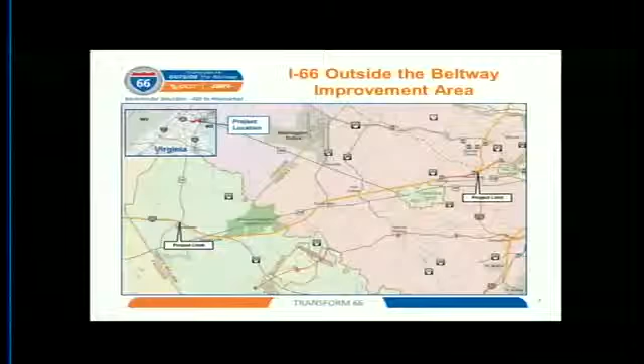Many of you have seen this map many times. We're looking at the corridor of I-66 from Route 15 in Haymarket to the Beltway, basically going through both Prince William and Fairfax counties and the associated cities and towns.

We've been very consistent in our message as we've rolled out this project. We started with a purpose and needs statement that looked at addressing the existing and future transportation concerns along the corridor, improving the multimodal mobility along I-66 by providing diverse travel choices in a cost-effective manner. We also looked at enhancing the safety and travel reliability along the corridor. One of the things I do want to say is that our focus has truly been on moving more people, not just moving more cars.

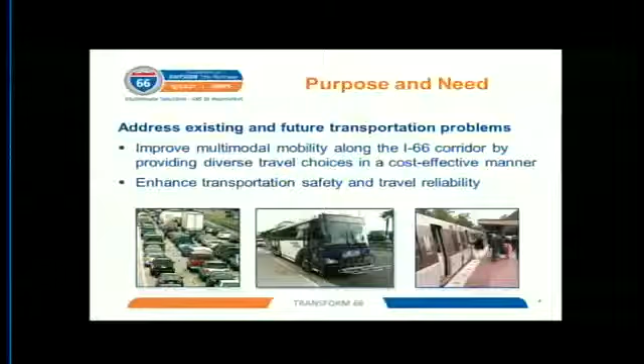Let me give you some background on the project, a recap of where we've been. In November of 2013, our federal partners, FHWA, approved a Tier 1 environmental impact statement with a record of decision. What that package entailed was 10 concepts that they advanced, and this project that you will see through this presentation is one of those.

Also, in July of 2014, we launched the Tier 2 environmental assessment for Transform 66 Outside the Beltway. In January and February of 2015, we held similar meetings in various locations to roll out the project and where we were at that time in the status of the project.

Our official public hearing, as I said before, was in May and June of this year, an opportunity to really record your comments as part of the official record. Also in August, our commissioner issued a finding of public interest, meaning this project is being considered under our PPTA public-private partnership. In order to advance a project under that concept, the commissioner has to issue this to make sure that it's in the best interest of the Commonwealth.

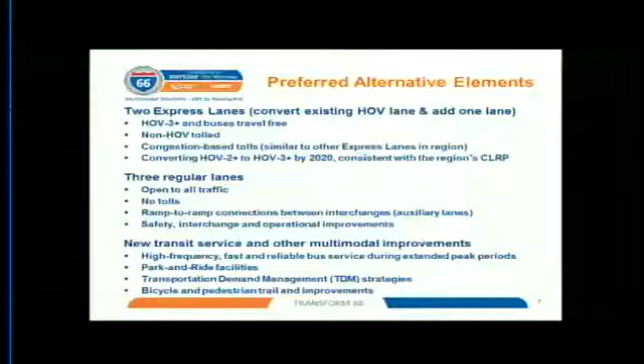So here what you have is a mainline cross-section. One of the key things that came out very early on from the public and from our partners around the region is the preservation of the median for future center-run transit. So you see that the preferred alternative does preserve that median. Many of the things you see, the 12-foot shoulders, the two express lanes, and then the three general purpose lanes, and then a 14-foot shoulder, being our typical section.

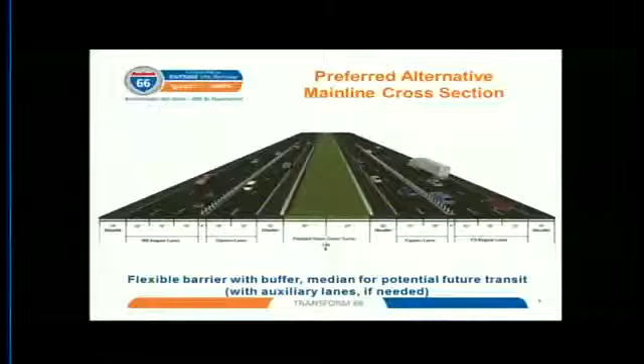So the phased approach, why did we decide to phase? One, we wanted to develop a project that could actually be implemented by 2021 and to invest wisely in I-66.

We realize that Metro is in the future, but we don't know when that's going to happen. So part of this project does not preserve the right-of-way all the way out through the corridor.

That will be handled in a phased approach as Metro comes online. Also, there is existing infrastructure that we can use instead of trying to tear down and rebuild, especially at Monument and Stringfellow, one of those areas where we're using much of the existing infrastructure.

So the elements of phase one basically include terminating the project at University Boulevard in Gainesville, which is approximately 4 miles shorter than going all the way to Haymarket. Also looking at phasing in the park and ride and the transit service as demand requires, and some of the safety and operational improvements.

Now, all of the improvements as far as the preferred alternative will be advanced in the environmental assessment, and basically the oncoming phases have not been worked out yet. However, our environmental document will cover the entire project.

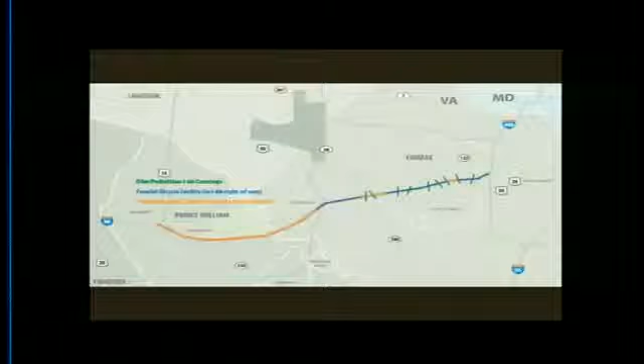In coordination with local partners and consistent with previous planning efforts, a trail concept parallel to the I-66 corridor has been developed. The project will provide more than 5,500 parking spaces through the expansion of 1 existing and construction of 4 new park and rides.

The project will offer new or increased bus service to regional destinations. Transportation demand management strategies may include increased marketing, education, and outreach, ride-sharing incentives, support for bicycling and walking, expanded employer outreach, and other incentives. In the next few minutes, this video will provide a brief overview of key features of the preferred alternative for Transform 66, as well as an initial near-term phase of the project, Phase 1.

The overview begins at the east end of the project, at the Capital Beltway, or I-495, and continues westward to the project's endpoint at Route 15 in Haymarket, Virginia. The preferred alternative is described throughout the overview, unless otherwise noted.

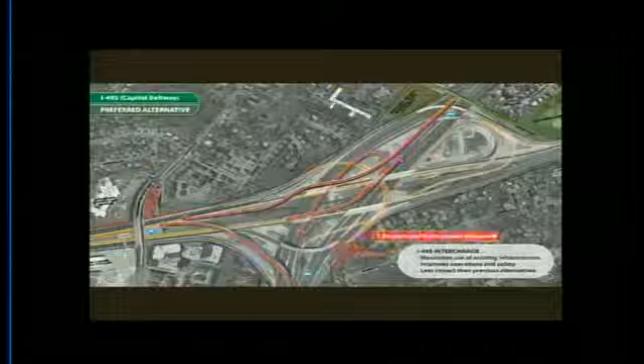Now let's get started. The I-495 I-66 interchange is one of the most complicated and important locations in the corridor. It connects the general purpose lanes on I-66 and I-495 and the future I-66 express lanes with the existing I-495 express lanes. The interchange layout shown here was purposefully designed to maximize the use of existing infrastructure, provide safe and efficient operations, and minimize impacts to surrounding neighborhoods and the environment.

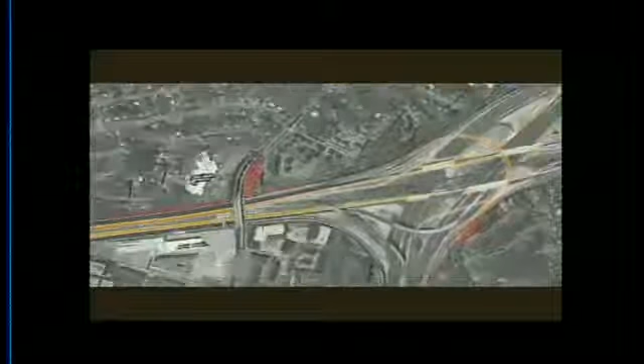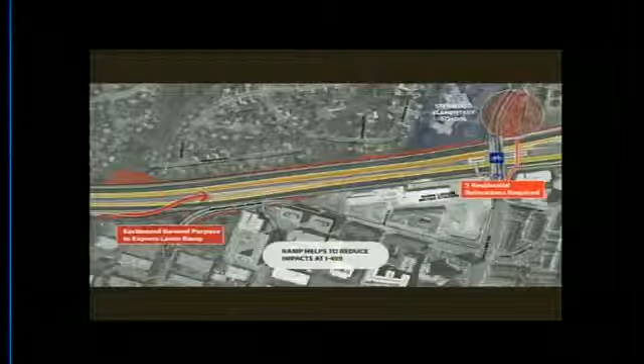Just west of I-495, the preferred alternative includes a direct access ramp connecting the general purpose lanes to the express lanes on I-66 eastbound. This ramp helps reduce the project's impact at I-495 at locations such as Stenwood Elementary School. In general, the project will provide 2 express lanes and 3 general purpose travel lanes in each direction of I-66, as well as bicycle and pedestrian trails and sidewalks, with local and regional connections.

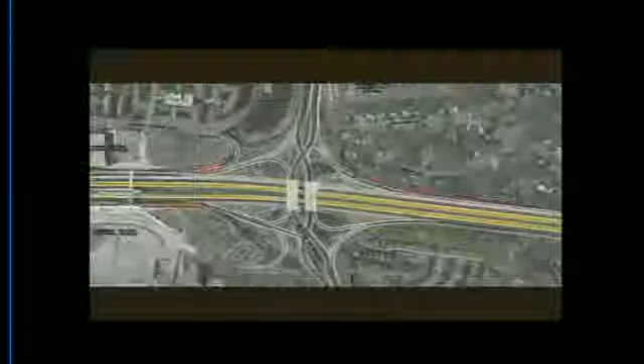At Nutley Street, the project will reconstruct the existing interchange and provide what is known as a diverging diamond interchange. This interchange configuration will efficiently and safely move traffic along Nutley Street and I-66, while moderating impacts to surrounding communities and Metro Rail.

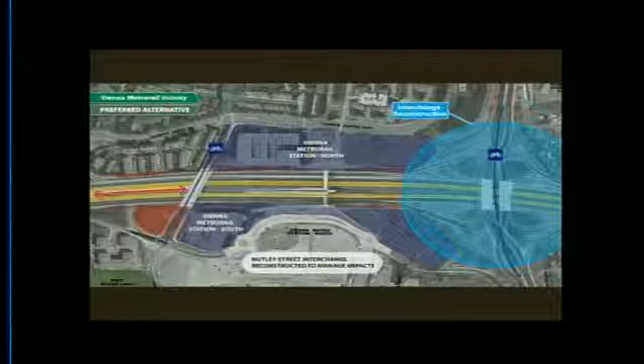At Vaden Drive, the preferred alternative includes ramps to offer drivers the opportunity to move between the express lanes and Vaden Drive to and from the west, improving access to the Vienna Metro Rail station.

As this overview continues, you may notice that in some locations an additional lane connects adjacent on and off ramps at interchanges. These auxiliary lanes help traffic flow between adjacent interchanges.

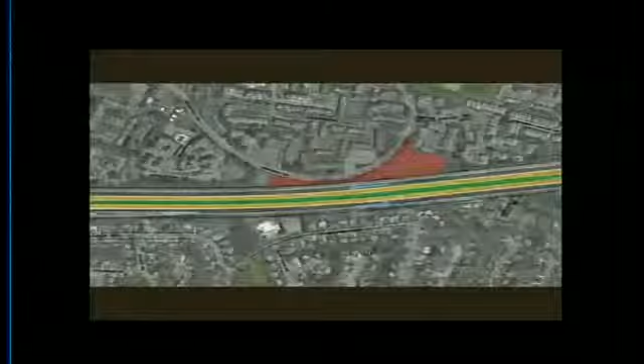At Route 123, the project will reconfigure the existing interchange to improve operations and safety, and also allow drivers to enter the express lanes in the eastbound direction and exit from the express lanes in the westbound direction.

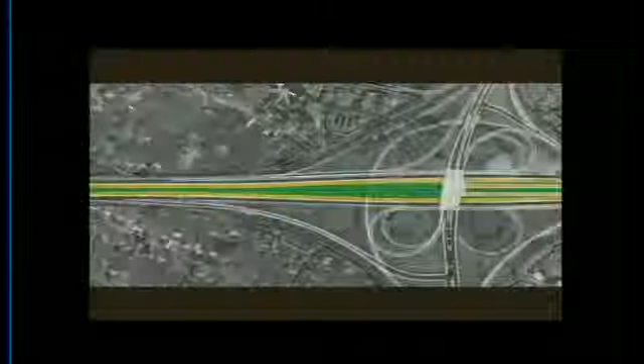Consistent with local jurisdictions' plans, enhanced bikeways, trails, or sidewalks will be provided for bridges reconstructed by the I-66 project. This graphic shows an example of this type of reconstruction that would occur for the Germantown Road Bridge.

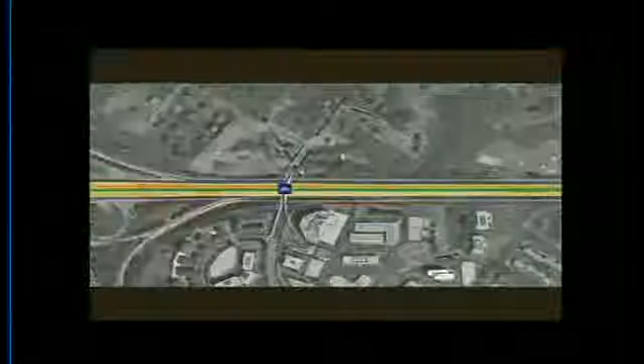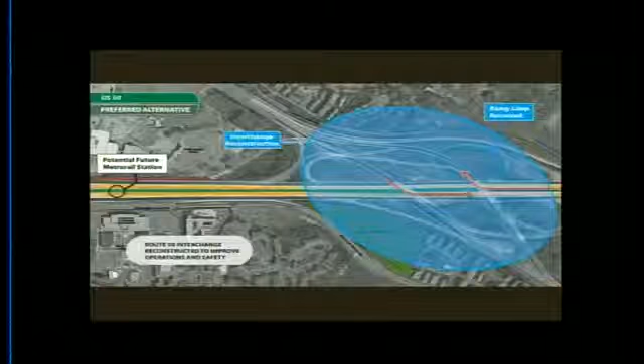At US Route 50, the project will reconstruct portions of the interchange to address existing operational issues, improve safety, and provide travelers access to the express lanes. The reconfiguration to remove the northeast loop ramp will eliminate the existing weave along eastbound I-66. New ramps will offer access from eastbound Route 50 to eastbound express lanes, and from westbound express lanes to westbound Route 50.

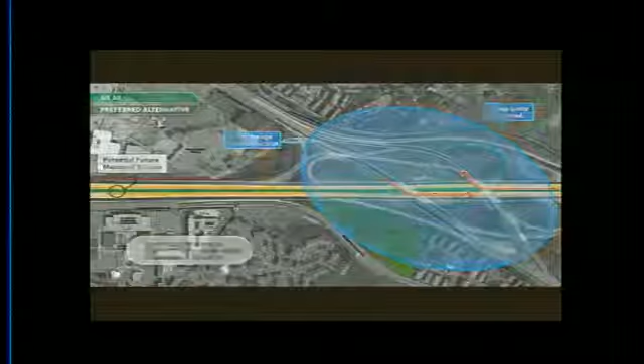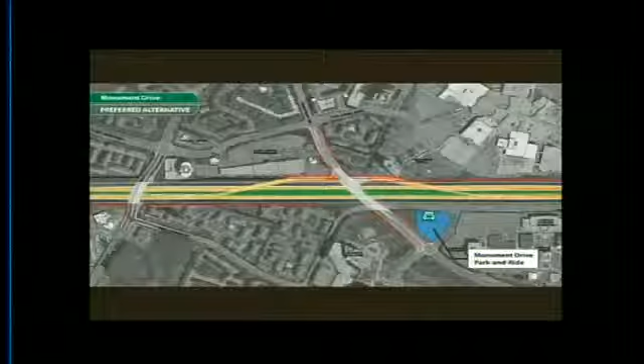At Monument Drive, the preferred alternative constructs new west-facing access, relocates all interchange ramps accessing the proposed express lanes to the north side of I-66, and reconstructs the Monument Drive and West Ox Road bridges.

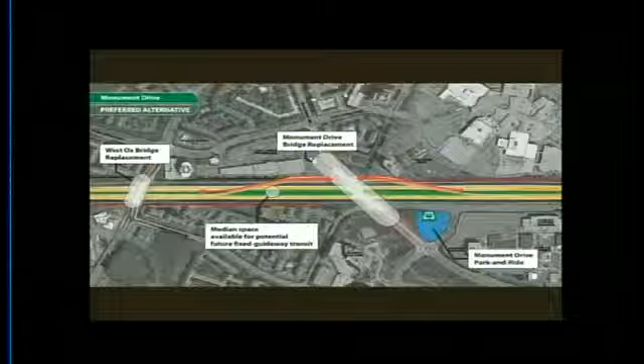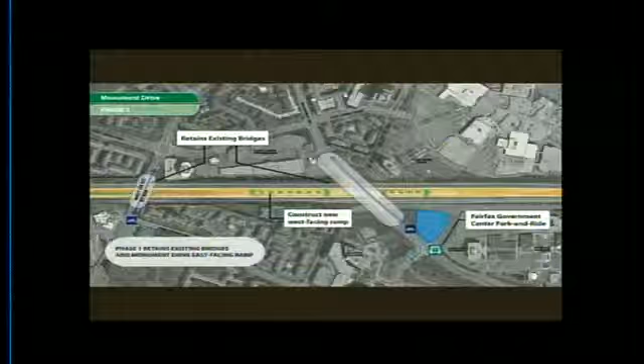Recognizing the cost and complexity of these changes, as well as the potential time horizon for a future planned metro station, the project includes an initial, near-term phase at this location. Here, Phase 1 retains the existing ramp and bridges at Monument Drive and West Ox Road, while adding a west-facing ramp. The preferred alternative and Phase 1 project include park and rides in this area of the I-66 corridor.

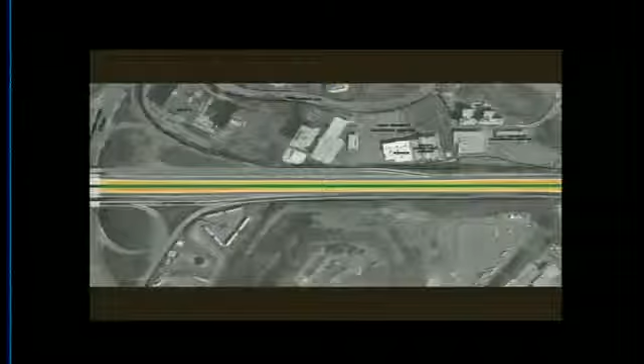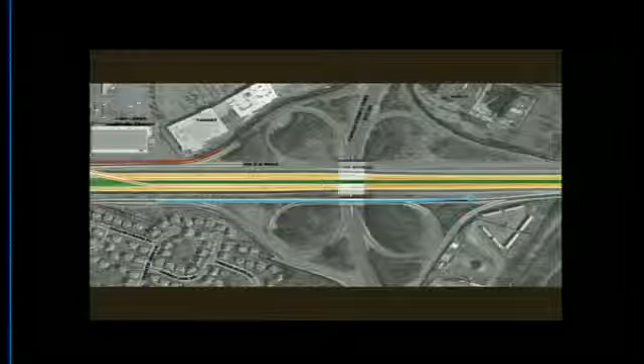No major changes to the Fairfax County Parkway interchange are included with the preferred alternative. Extensive coordination occurred with Fairfax County to identify future needs of potential high-occupancy vehicle lanes on the parkway. The preferred alternative will construct a lane in portions of the eastbound Collector Distributor Road, or CD Road, to improve traffic operations and accommodate future express lane operations.

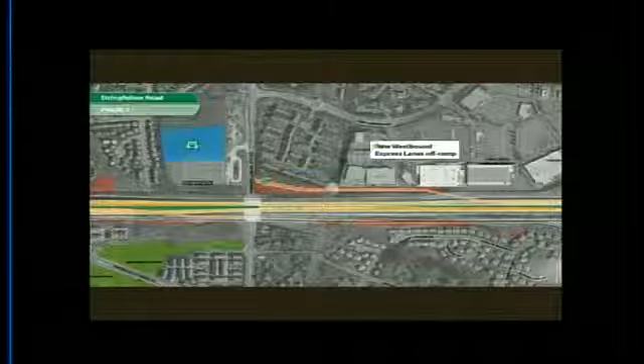At Stringfellow Road, the preferred alternative will provide direct express lanes access to and from the east through relocation of the existing ramp to the north side of I-66. Similar to Monument Drive, a Phase 1 approach is planned here and would use the existing ramp as a part of the express lane's access.

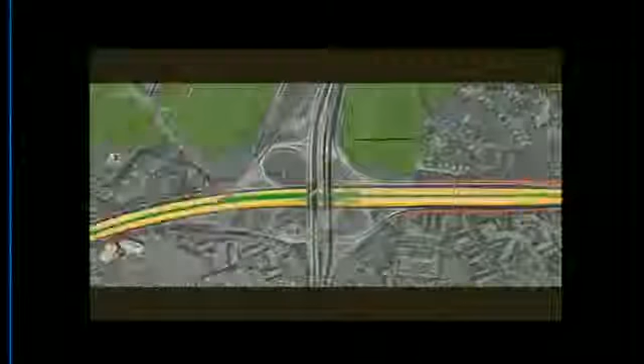Improving the I-66 Route 28 interchange is key to solving gridlock at one of the region's most congested locations. The new interchange will offer direct access between Route 28 and the express lanes in key directions. The new interchange bridges will be built to accommodate future transit along I-66.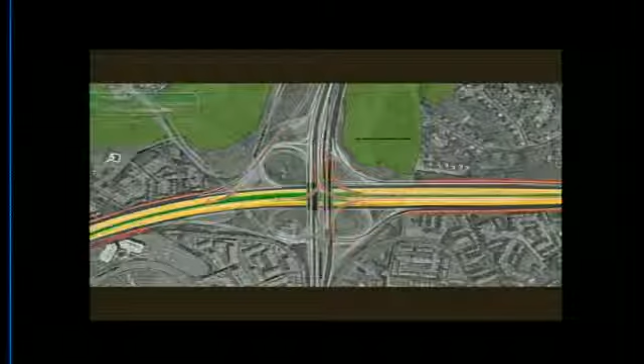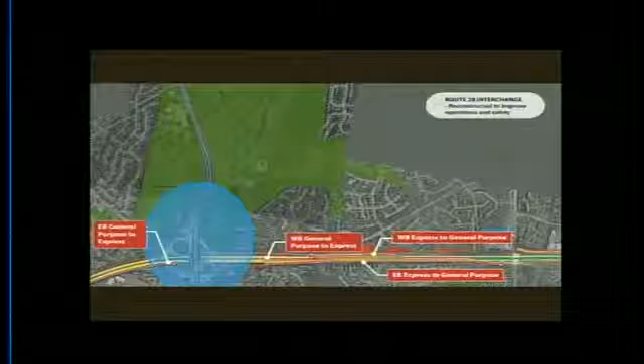In the vicinity of the interchange, opportunities are provided to transition between express lanes and general purpose lanes along I-66. Along Route 28, the project removes existing traffic signals, improves access and operations at Braddock and Walney Roads, and changes access to Eleanor C. Lawrence Park, consistent with the park's master plan.

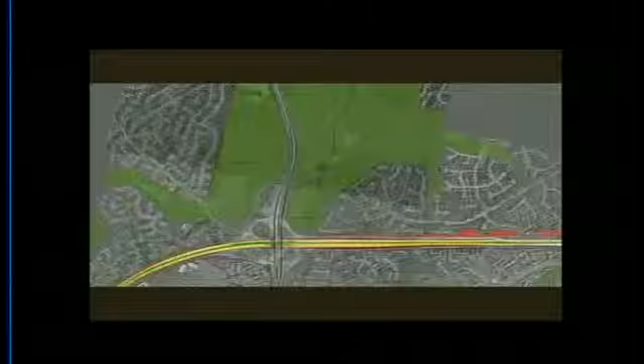At Route 29 in Centreville, preserving space in the median for future transit would require the reconstruction of the existing bridges and interchange. Similar to Monument Drive and Stringfellow Road, a Phase 1 approach will be used here. In Phase 1, the I-66 median width is reduced, allowing the existing bridges over Route 29 to remain.

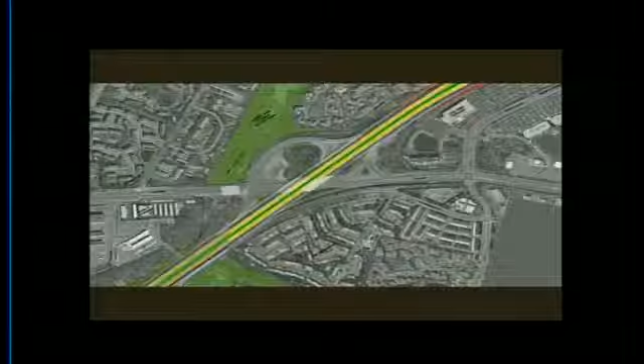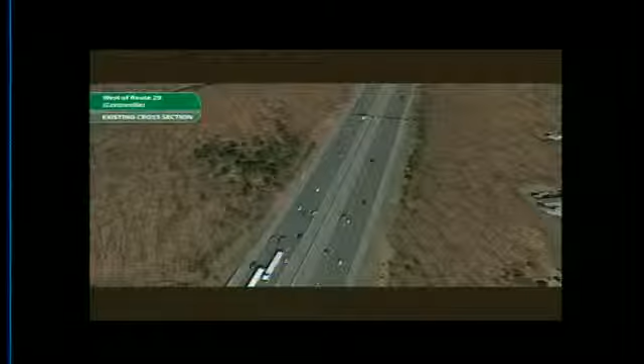From west of Route 29 Centreville to University Boulevard, implementation of the preferred alternative cross-section will be phased. The existing cross-section has 3 general purpose lanes, 1 HOV lane in each direction, a paved inside shoulder, and a concrete median barrier. Phase 1 of the project minimizes the widening needed by keeping the existing paved shoulders.

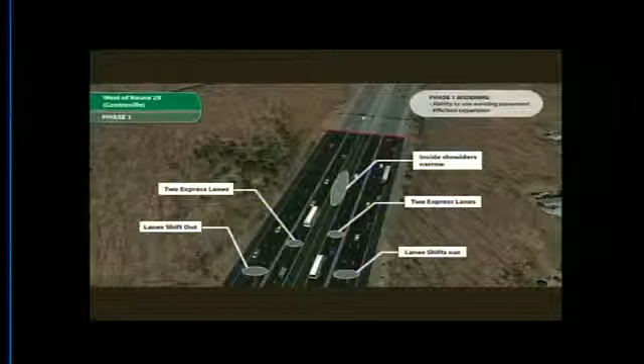In Phase 1, 3 general purpose lanes, 2 express lanes, adequate shoulders, and dividers are accommodated in each direction. Should a future transit investment occur in the median of I-66, the preferred alternative could be constructed and may require further widening of I-66.

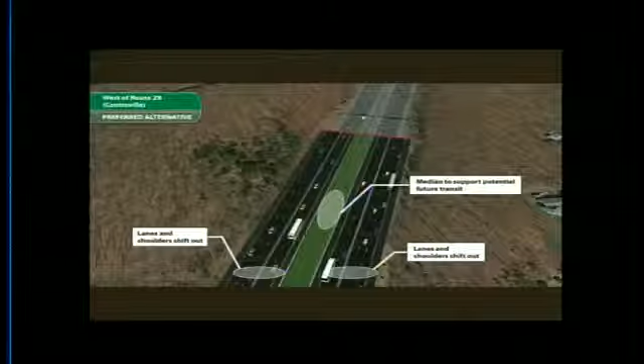In this section of I-66, the preferred alternative does not impact existing parks. The preferred alternative in this location was influenced by extensive work with key project stakeholders, such as the National Park Service, as well as comments from the public.

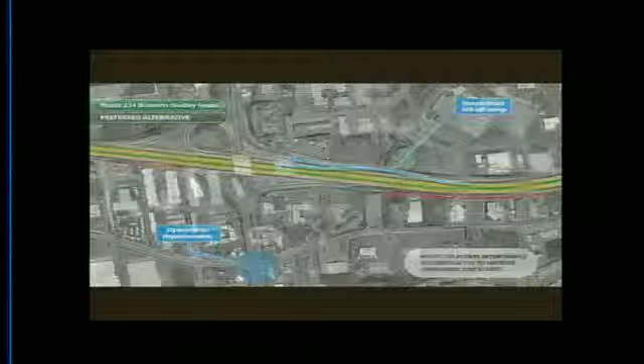At Route 234 Business, the project continues the 2 express lanes and the 3 general purpose travel lanes in each direction. The westbound off-ramps from the general purpose lanes at Route 234 Business are combined into a single exit point with improved deceleration lanes, separating the exiting traffic from the through movements on I-66. In addition, safety and capacity improvements will be constructed at the intersection of Route 234 Business and Balls Ford Road.

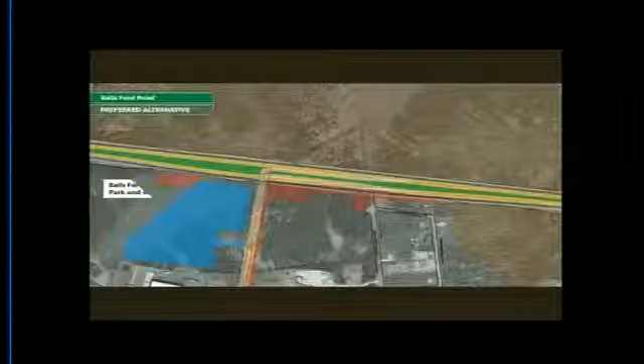Along Balls Ford Road, the preferred alternative includes a new park and ride facility with access to the express lanes. This facility will be connected to existing area pedestrian and bicycle networks, and also will include sidewalks and bikeways within the lot to connect people to services offered at the park and ride.

Once in the park and ride lot, people will be able to choose between parking for bus transit or ride sharing, or picking up and dropping off passengers. Designated spaces will allow people to connect with a bus, vanpool, or carpool serving their destination.

Once the bus, carpool, or vanpool departs the park and ride lot, it will have convenient and direct access to nearby express lanes, which buses and HOV3 vehicles can use free of charge. Vehicles with 1 or 2 people can access the express lanes, but they would be charged a toll.

The features, access, and services offered at the Balls Ford Road Park and Ride lot are similar to those that will be available at the other park and ride facilities being constructed with this project.

At Prince William Parkway, or the Route 234 bypass, the preferred alternative will provide direct access to the westbound express lanes from Route 234, and direct access from the eastbound express lanes to Route 234.

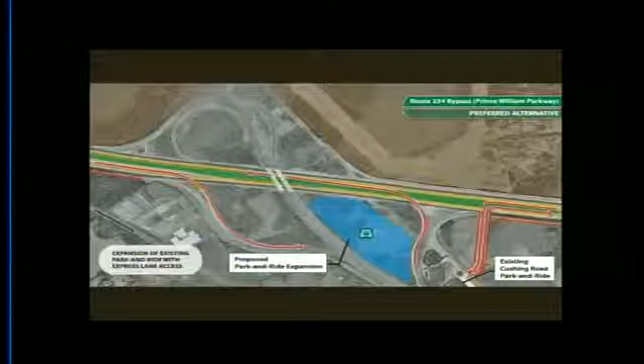In addition, the existing park and ride along Cushing Road will have direct express lanes access to and from the east. The express lanes access and expansion of the Cushing Road park and ride lot will occur in a later phase of the preferred alternative.

University Boulevard in Gainesville is an important location for the project. The project will provide a park and ride here that is adjacent to I-66, and the overpass will have express lanes access to and from the east.

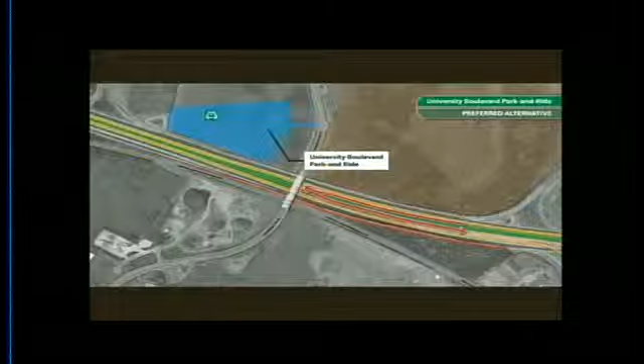In the preferred alternative, the express lanes will end west of Route 15 in Haymarket. In Phase 1, the express lanes will end at University Boulevard and transition to HOV lanes.

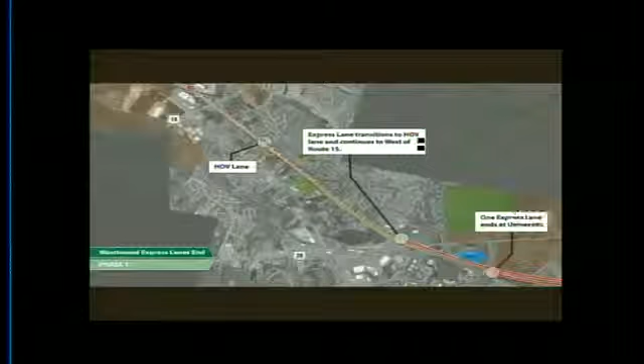At Route 29 Gainesville, the preferred alternative includes minor modifications that will tie into the I-66 widening that is currently under construction.

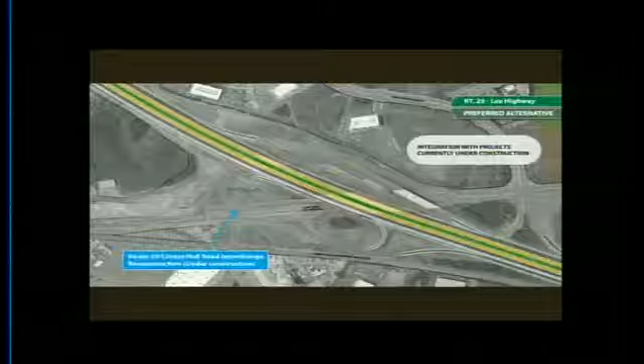At Route 15, in the preferred alternative, 2 express lanes and 3 general purpose lanes will continue in each direction through the interchange, which is currently under construction as a diverging diamond under a separate but coordinated project.

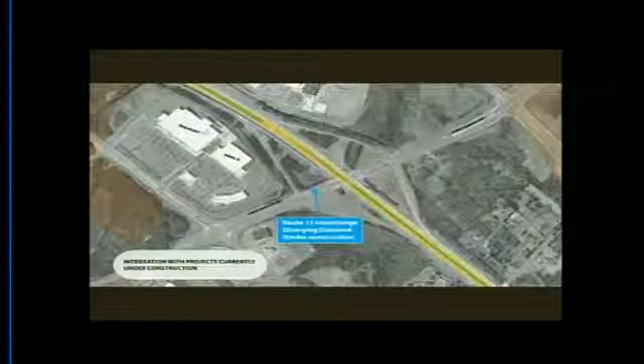The express lanes will begin and end at the preferred alternative's western end in the vicinity of Antioch Road and Haymarket. Access will be provided in both directions between Antioch Road and I-66. At this location, the project includes a park and ride north of I-66 and east of Antioch Road.

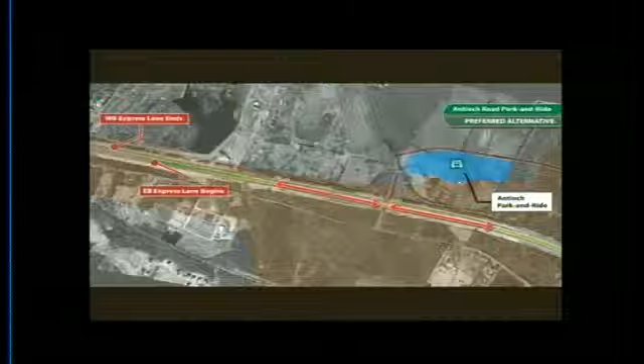The Commonwealth's Transform 66 Outside the Beltway project is a multimodal investment in long-term mobility for Northern Virginia. The combination of transit, bicycle and pedestrian access, and general purpose and express lanes will keep travelers in the I-66 corridor moving safely and reliably for decades to come. For more information on this important multimodal transportation initiative in Northern Virginia, please visit transform66.org.

While Susan is coming up, we do have a vehicle with their lights on, Virginia plates XDF 3891. Your lights are on.

Good evening. I'm Susan Shaw, working on this project along with our project team. I wanted to talk with you a little bit about our environmental results of our preferred alternative. Since we came to you with plans back in May and June, we've been able to reduce many of our impacts along the corridor, including those to environmental properties.

When we looked at the plans previously, we showed that 10 properties within the area were historic properties that potentially could be impacted, and we have been able to avoid all direct impacts to the historic properties along the corridor.

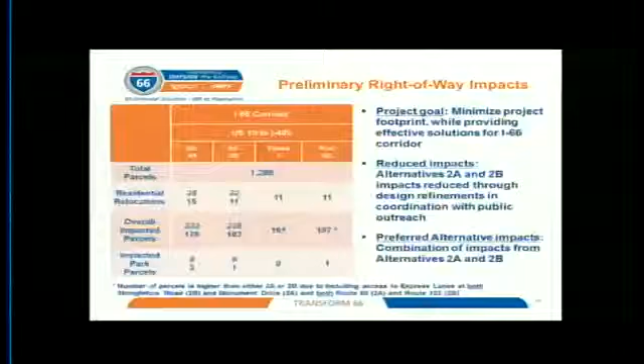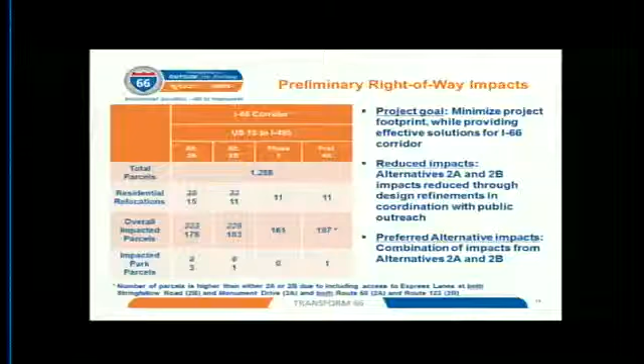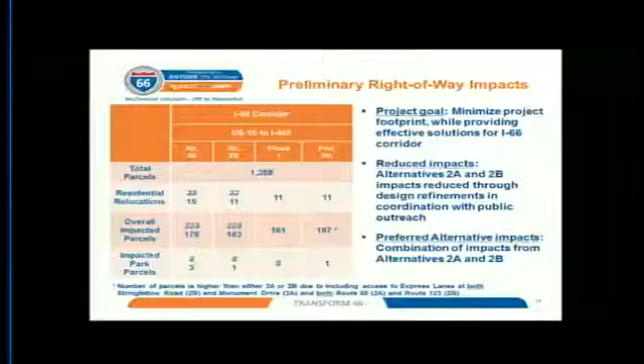We've worked hard to address agency and public comments in our revised environmental assessment. This chart shows some of the changes to our right-of-way impacts. Originally we had as many as 35 residential relocations in our initial concepts, and we've been able to reduce that down to 11. Our Phase 1 alternate shows 161 potential partial takes along the corridor. When you look at the total number of parcels that abut 66, it's over 1,200. So while we still do have impacts, we've worked very hard to try to minimize that footprint.

So I'd like to walk you through a few slides on some of our findings on our traffic analyses. The preferred alternative, we've now analyzed for 2040, which includes the entire project out to Route 15, and then we've looked at the Phase 1 or initial study in an interim year, 2025 analyses.

What we're finding is that our proposal moves more people through more modes in both the AM and PM peak periods. We're seeing significant reductions in the duration of congestion and in the severity of congestion, both in the morning and evening peak periods. This results in improved speeds on 66 and a reduction in travel times. We also are seeing that we're improving safety issues and reducing bottlenecks in the corridor.

I'm focused here on improvements to our general purpose lanes. Of course, our express lanes are required to move at a minimum of 45 miles per hour, and the tolls will be congestion priced to make sure that happens. So these analyses are really focused on the general purpose lanes.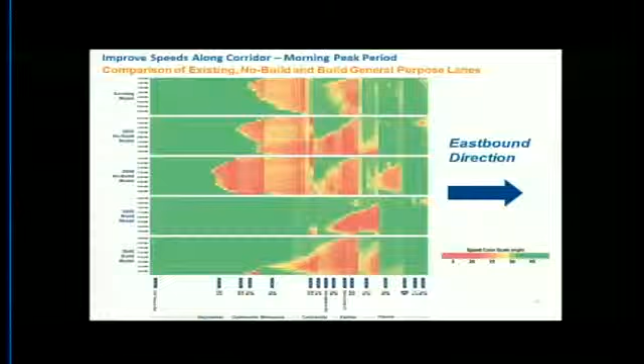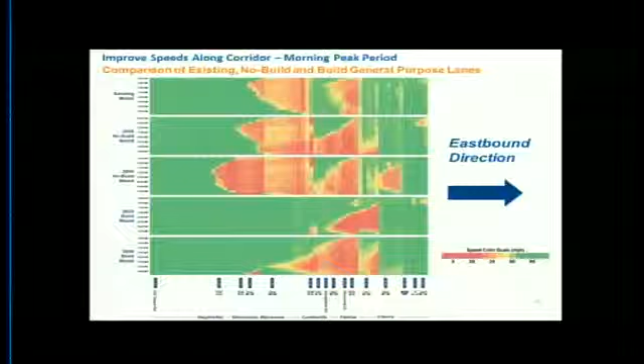You can see that we do have some congestion, but it's shorter than what you see in the existing and no-build conditions. This congestion starts at Nutley Street and spills back a little bit to Route 50 in our 2025 condition, and we also have that in 2040. I think this speaks to the fact that we understand the strong emphasis on minimizing our impact to the surrounding communities. These congestions in the general purpose lanes could easily be solved by adding lanes, but what we're really trying to do is keep our footprint small, make the best use we can of the existing areas, and minimize impacts to the surrounding community. So we've tried to balance our plan.

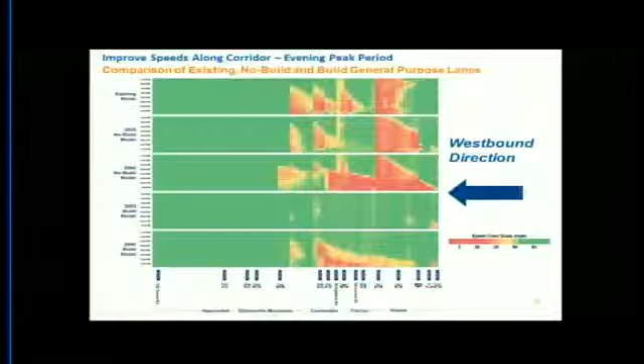In the no-build condition in 2025, you can see that gets much worse, extending beyond the period of time that we studied. This was from 3 p.m. to 7 p.m., so you're getting backups that go beyond the 7 p.m. time frame, building from 3 p.m. Then you can see this getting much worse, extending into the 8, 9 p.m. hours that you just don't even see because it's off of our heat maps.

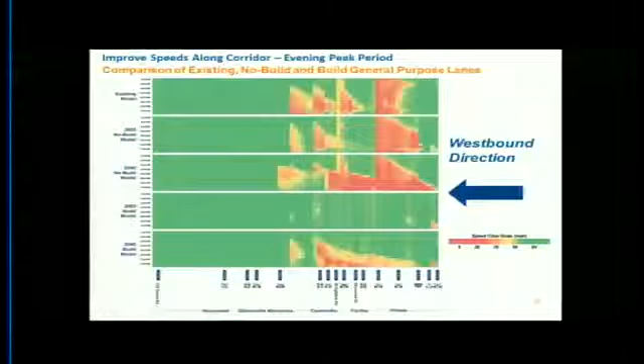This fourth bar down shows our 2025 build conditions, so you can see significant improvements. There are some shadows of slower speeds, dropping below 50, 45 miles per hour, but largely improved in the westbound direction. Then you see some of that building in the 2040 time frame. Again, we're not 100% building ourselves out of congestion. We recognize this is a balanced approach in the corridor.

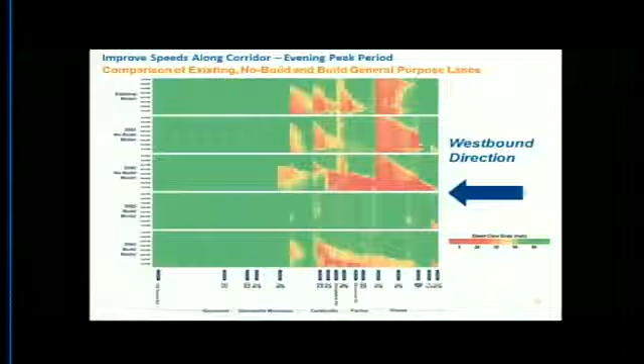So now I'd like to invite Todd Horsley to come up and talk about our transit components.

Thanks, Susan. I'm Todd Horsley, Director of Northern Virginia Transit Programs for the Virginia Department of Rail and Public Transportation. Over the many months that this I-66 project has been developed, one thing VDOT and DRPT have heard loud and clear from the Secretary of Transportation, senior management in VDOT and DRPT, and our local elected officials is that...

Any project to improve I-66 outside the Beltway must have a robust transit component to it. Without a transit component, there really is no I-66 project.

So given that direction, over the last several months, DRPT staff and our consulting team have worked with all of the local jurisdictions and transit providers in the region to try to come up with the most effective transit service plan we can possibly come up with, given the resources available as part of this project.

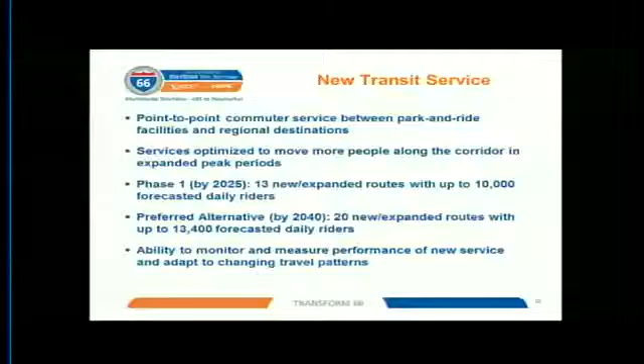The next element of this project is the park and ride facilities. We anticipate constructing 4 new park and ride facilities and expanding 1. The expansion will be in Gainesville at Cushing Road. The 4 new facilities would be in Haymarket, in Gainesville at University Boulevard, at Balls Ford Road in the Manassas area, and at Monument Drive in what we're calling Fairfax Center, which will eventually be a parking structure. In the short term, we plan to use existing parking spaces at the Fairfax County Government Center to operate our transit service until plans can be made to build that structure.

By 2021, the opening year of the project, we plan to have approximately 4,000 spaces constructed, and by 2040, a total of 6,500 spaces.

These park and ride facilities will have amenities that support transit, carpooling and van pooling. We don't want only transit riders using these facilities—we want people to go there and carpool and van pool together. There's also kiss and ride, where people can drop others off to catch the bus.

Other amenities at these facilities will include real-time transit information and real-time traffic information, as well as covered bicycle storage, so we'll be encouraging people to ride their bikes to the park and ride facilities when possible. They'll also have direct access to the express lanes and convenient connections to the local roadway and trail networks, so buses or anyone parking here can take advantage of the express lanes if they qualify.

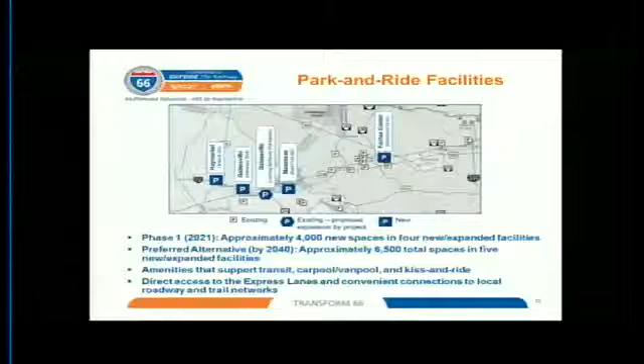The final element of our transit plan is TDM strategies, transportation demand management. We have a very robust network of TDM programs in the region right now, and we're fortunate to have that. A lot of regions don't. They're very effective. If you think traffic on I-66 is bad now, without these TDM strategies already in place, it would be much worse. But we're going to further enhance our TDM strategies as a result of this project.

TDM strategies are basically strategies that make it easier and more affordable to use alternative transit or travel options. The TDM strategies we'll use for this project will directly promote the use of the express lanes, the new transit services, the park and rides, and ride-sharing opportunities. These will supplement the ongoing TDM efforts that already exist in the region.

Some of the specific project strategies, Renee touched on this earlier, but I'll run through these. Corridor marketing and outreach—we want to make sure people understand the new features of the I-66 corridor, like the express lanes and the park and ride lots. So we'll be doing a lot of marketing and outreach regarding those features before the project opens and during the project.

Limited time fare buy downs for new transit users. We found that if we can get people on a bus and riding it a few times, we have a pretty good retention rate of keeping them on the bus. So one way to get them on the bus is to give them free rides for a while. That will be part of the strategies we use.

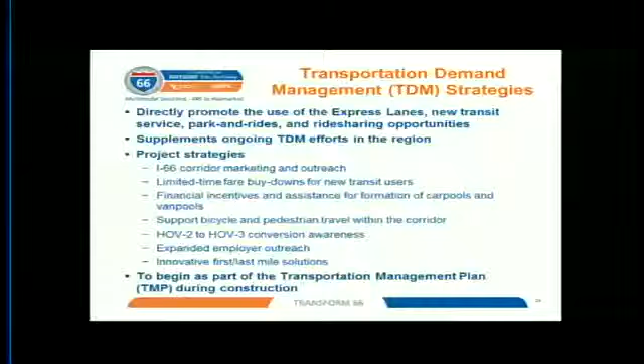Also, some of the transit services we mentioned earlier—we'll take a look at those and figure out hopefully some that we can implement as part of the Transportation Management Plan as well. So that is the rundown of our transit and TDM features of the project. I'm going to turn this back over to Susan.

Okay, we're almost done. So bicycle and pedestrian access was covered in our video.

Wherever we have bridges being reconstructed as part of our project that need to be lengthened to carry the larger typical section on 66, we are looking at providing trails, sidewalks, and bike lanes in accordance with the local transportation plan. You can see an example of this at Germantown Road—the existing pedestrian facilities on the existing bridge, which are pretty much non-existent, and what we're proposing in the future, which does match up with the county's transportation plan.

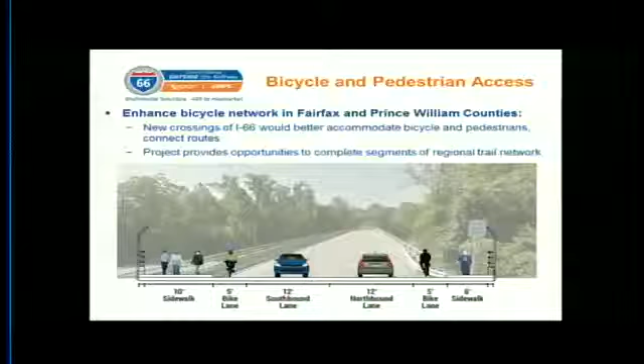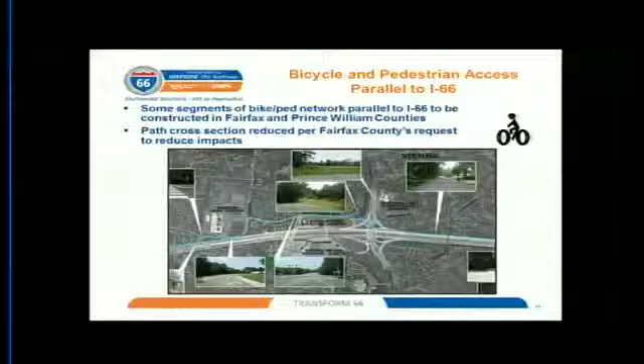In addition, we'll be looking at making logical connections so we have a seamless network. The other thing we've added since our meetings in May—we had some conceptual ideas about a trail along 66, and we're now showing that. We've incorporated that into our plans, which you can see out on the boards. We're showing a trail along 66.

It's generally located on the highway side of the sound wall, where a sound wall exists. We still have some details to work out, but this shows the conceptual plan. We've worked with our counterparts in both Fairfax and Prince William to come up with a plan that we think can be effective and provide a regional trail along 66.

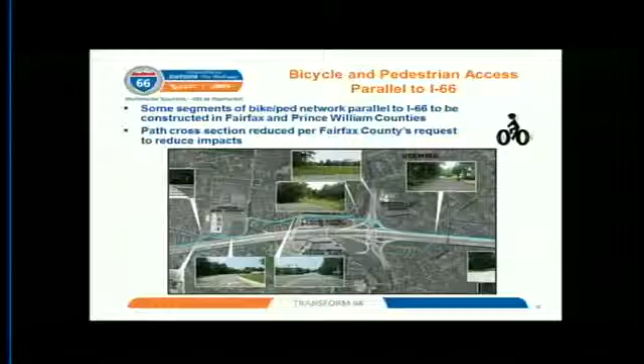Another effort that's going on simultaneously with our NEPA process is our procurement process. So we're beginning to look at how we can deliver this project. The Secretary of Transportation has talked about this a number of times at our May CTB meeting and again in August, but we're considering both publicly and privately financed options.

Right now we're moving through a process with 3 different options. One is a typical, sometimes called a P3 or design, build, finance, operate, maintain process, where it would be very similar to what we have on 495 and 95, where a company will come in, design, build, and then be responsible to operate and maintain the facility for a period of time. We've set that time a maximum of 50 years.

Another option being looked at that would be publicly financed is design, build, operate, and maintain. In that case, the toll money would be coming to the state, and then we would be paying the team. They would be responsible to operate and maintain, but for a smaller time period, and they would not have the revenue risk in terms of the toll revenues.

And then a third option is just a design build option where they would not be responsible for any operation or maintenance once the project is constructed. You'll hear that listed with a term called alternative technical concepts, but I would note that the alternative technical concept process really does apply to all 3 methods.